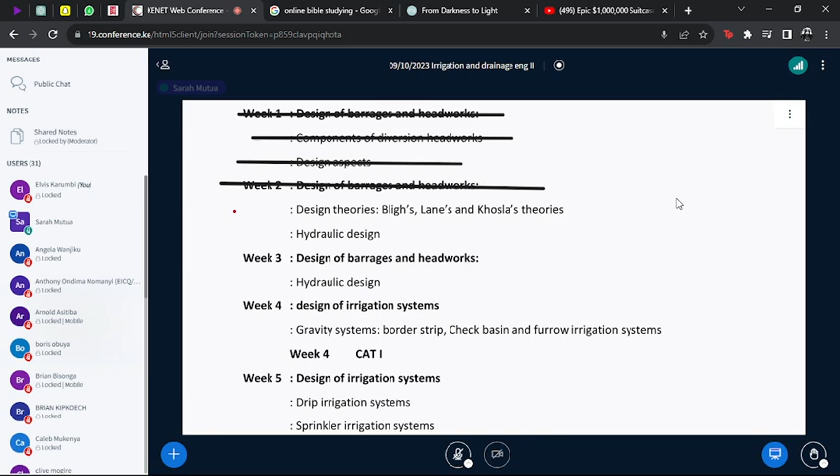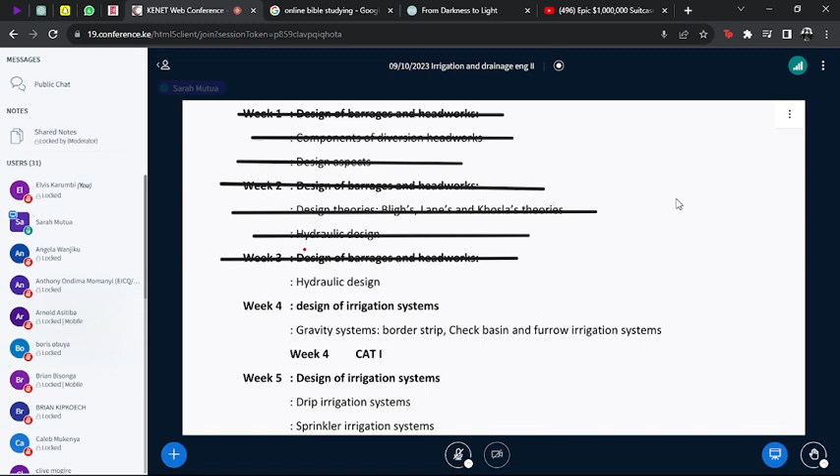In Khosla's theories, we have done up to, let me check. We have done up to that part. Oh, so I was worried for no reason, eh? Let me see. We still have a lot.

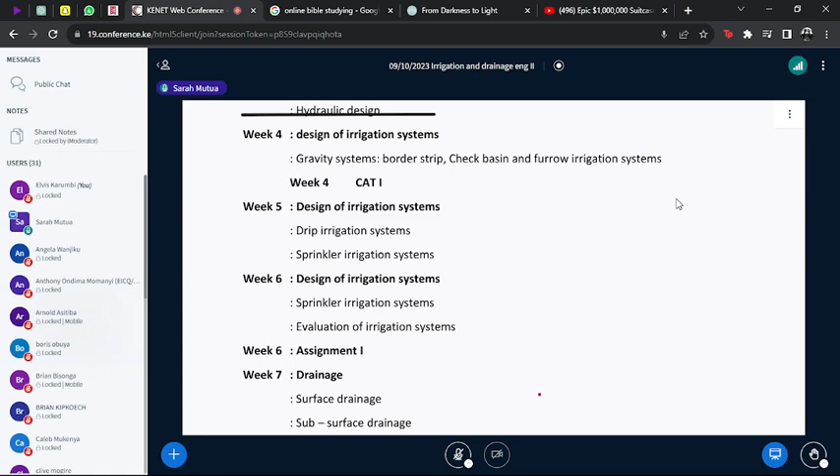What I want us to do today: after the water leaves barrages and diversion headworks, it goes to canals. Conveyance systems can be a pipe system or whatever, but most of the time it goes to a canal. And we are supposed to do canals somewhere. Yes, we are supposed to do drainage, and in drainage we are supposed to do canals. So I want us to go directly today and look at canals. We'll look at drainage later.

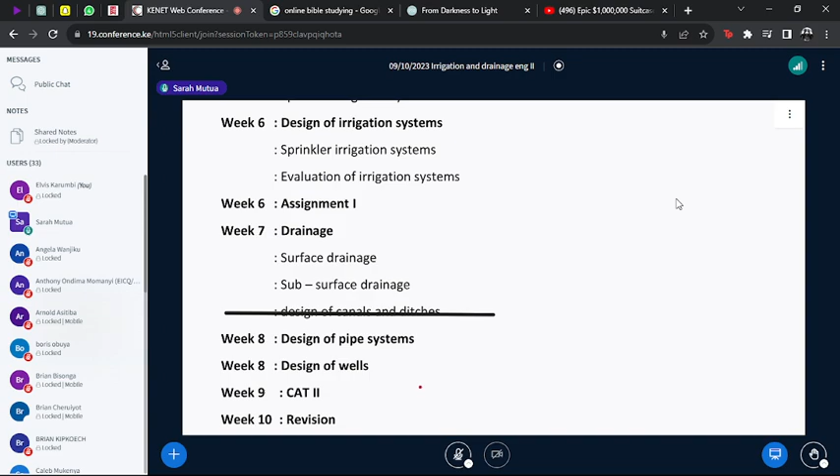Before we come to the design of the irrigation systems. Of course, we will start with gravity systems, then come to sprinkler, then drip irrigation systems. Design of pipe systems, I don't know whether I should give one, but I shall decide. I always leave that one undone because it is done elsewhere, like in design of water and wastewater systems. So today, I want us to look at canals.

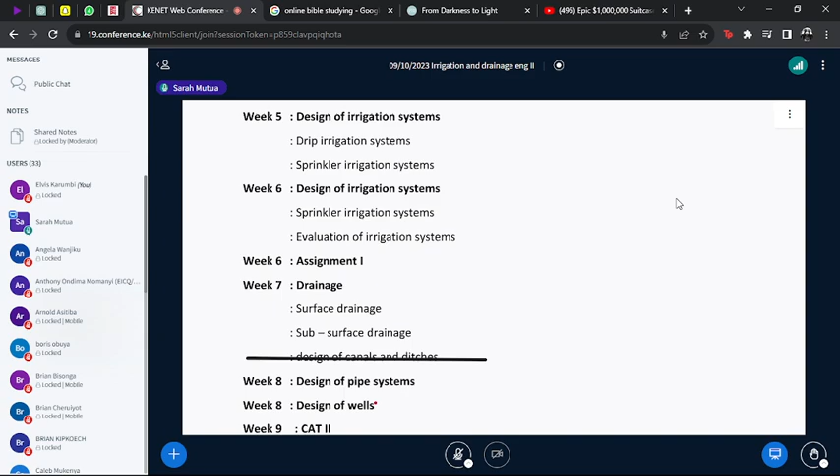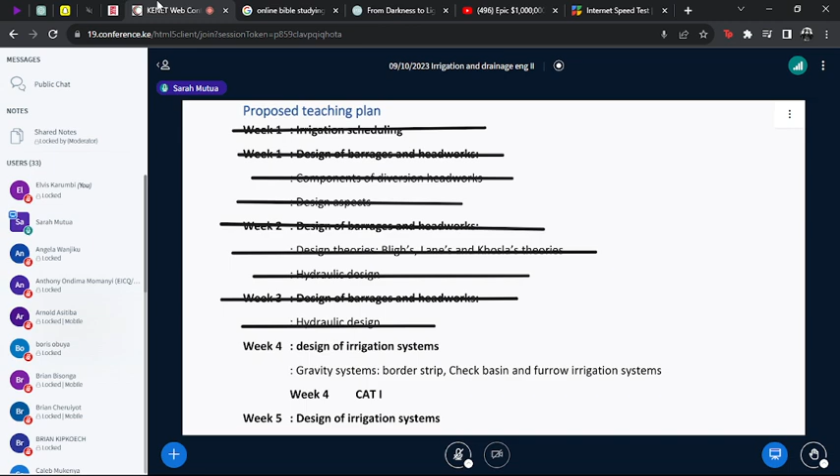I want to look at canals so that then I can take a snip of what we have here so that we can know where we are. Surface irrigation tool. All right. With that, let me open the canals. What am I doing?

So, like I've said, water, once it leaves the irrigation system, has to go to a conveyance system so that you can transport that water from the source to the point where it is supposed to be used in an irrigation scheme. Most of the time the water is delivered in earthen canals. If they are not earthen canals, we have looked at hydraulics, flow of water in non-erodible open channels, whereby the normal equations of Manning's, Chezy, and so forth are used.

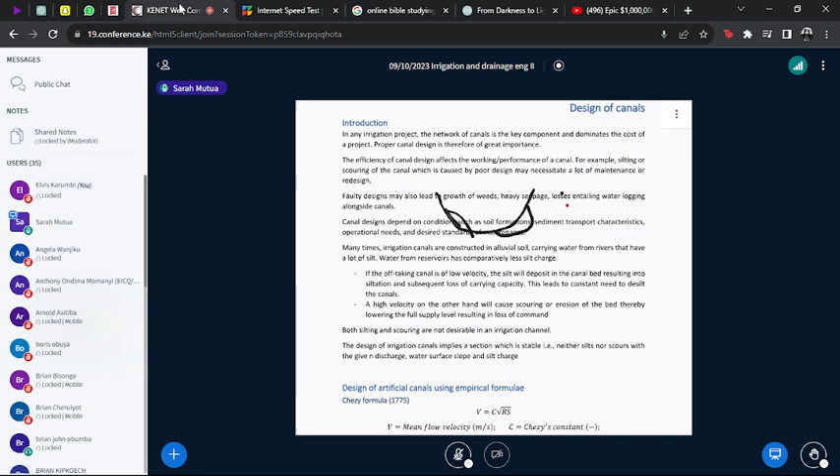But now, what happens when your channel is erodible? If it is erodible, that is earthen canals, for example constructed in alluvium soil, let's say initially you have constructed a channel that has such a cross section. One day you may have erosion on one side, or deposition, and erosion on the other side, such that the following day you have a channel that looks totally different because of erosion and deposition. Why? Because you have constructed that channel in alluvium, so it is erodible.

And depending on the conditions of flow, the slope and discharge, which control the velocity of flow, and also the amount of silt in the water. Remember, in rainy seasons we have higher silt content in channels. You are going to have either deposition or erosion. So in this case, the channel is changing from day to day.

Now my internet, if I become too shaky, you'll tell me. I tried to sort it in the morning. That is why I was late. But if I become too shaky, you'll tell me.

So the cross section one day is one thing, the following day it's different. The slope has changed, the wetted perimeter has changed. And so the formulas we have learned before for calculating flow, for example Manning's equation in non-erodible channels where the cross-section and slope are constant, can no longer be used. Secondly, when deposition and erosion happen, you can have many undesirable conditions. For example, with deposition you can have weeds growing in the channels, increasing resistance to flow, and greatly affecting the efficiency of your systems.

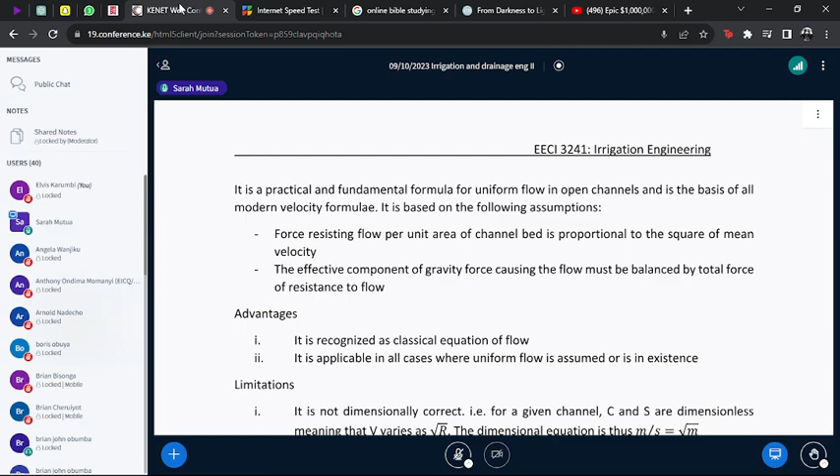It has certain advantages because, one, it is recognized worldwide as a classical equation of flow, the oldest. So it is recognized and it is applicable in all cases where uniform flow is assumed or exists. But it has some limitations. One of them, when you look at this equation,

velocity units are meters per second. The right-hand side, C, is a constant which is unitless. R, the unit is meters. S is unitless. So when you look at the units, meters per second, on the right-hand side, the resulting unit is square root of a meter. So that equation is dimensionally inconsistent, or we can say it is dimensionally incorrect.

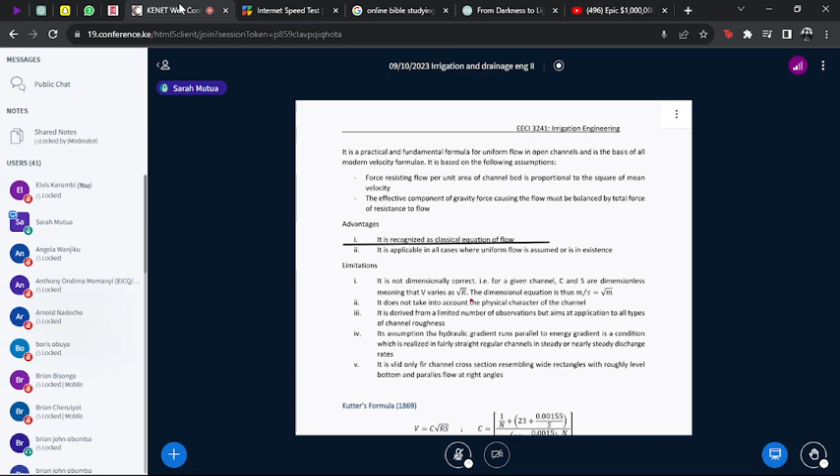And we have done dimensional analysis before, so this one is not dimensionally correct. Two, it does not take into account the physical character of the channel. Notice, one of the assumptions is that the effective component of gravity force causing the water to flow must be balanced by total force of resistance. Where does this resistance come from? It will come from the physical character of the channel, but the Chezy formula does not take any cognizance of that

kind of assumption. Thirdly, it is derived from a limited number of observations, but then it is applied in all types of channels. Roughness. Then the assumption that the gradient runs parallel to energy gradient, a condition which is realized in fairly straight regular channels in steady or nearly steady discharge rates. And I talked already about that slope, the water surface slope that we assume to be equal to the channel slope.

But what this limitation says is that it is based on an assumption of steady or nearly steady discharge rates. But does that happen always? Well, we know we can try to manage and control that by having canal head regulators, but are we going to have steady discharge? Then it is valid only for channel cross-sections resembling wide rectangles with level bottoms and parallel flow at right angles.

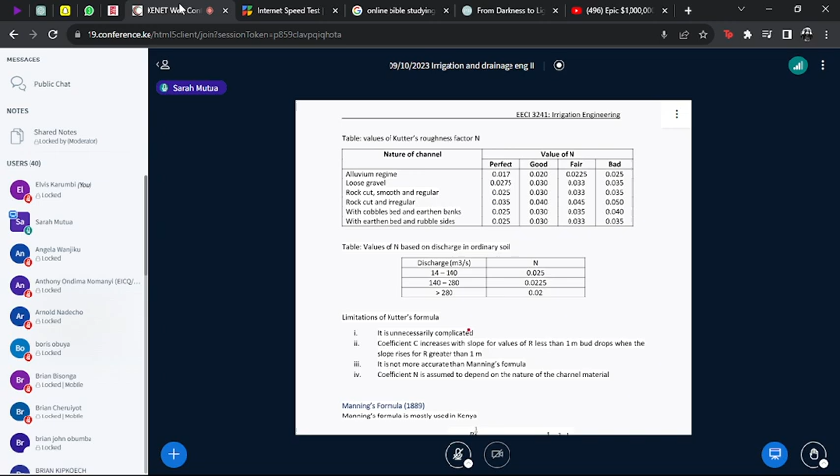One thing you notice about calculating velocity of flow using this formula, especially when you go to the field, there's a lot of subjective decision making. What is the definition of perfect? What is the definition of good? Fair? Bad? That is a question that you always have to answer. Even when you are doing Manning's formula, those are the questions you are supposed to answer when making a personal judgment call in the field.

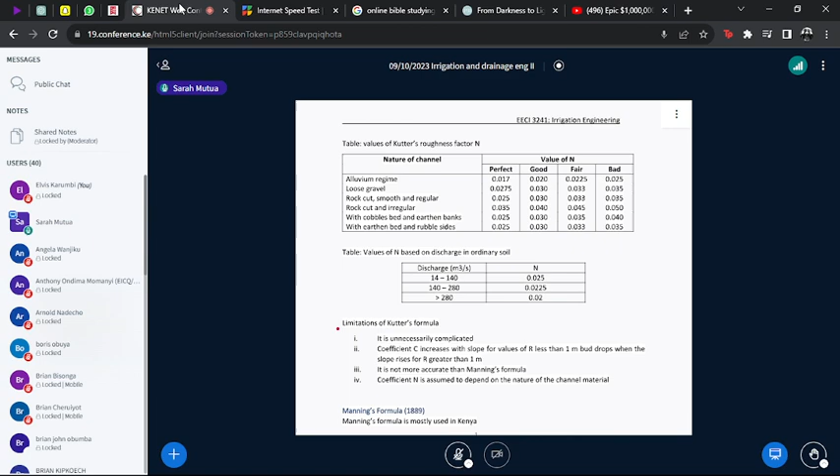The values of N also are based on discharge in ordinary soil, and the values are given. And we have some limitations. One, it is unnecessarily complicated. Really, look at where we have started: V is equals to C root RS, and then someone adds to C, and C becomes all this very, very complicated.

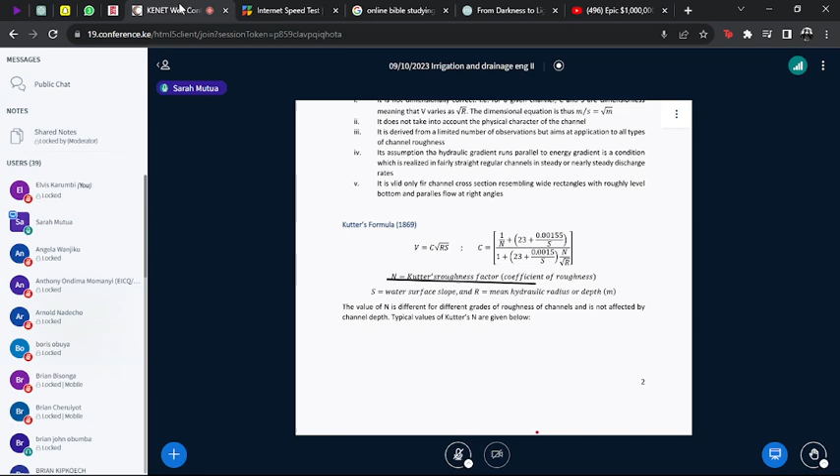Brian John Obumba, you got us joined with the call option, microphone option. I think we have agreed that before.

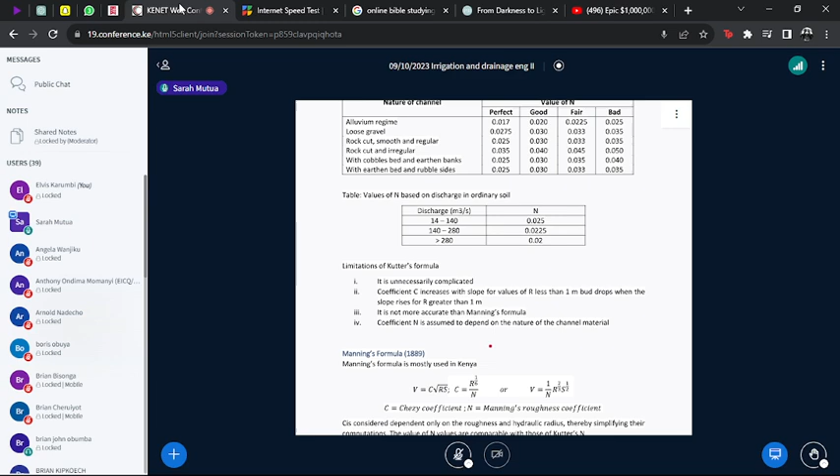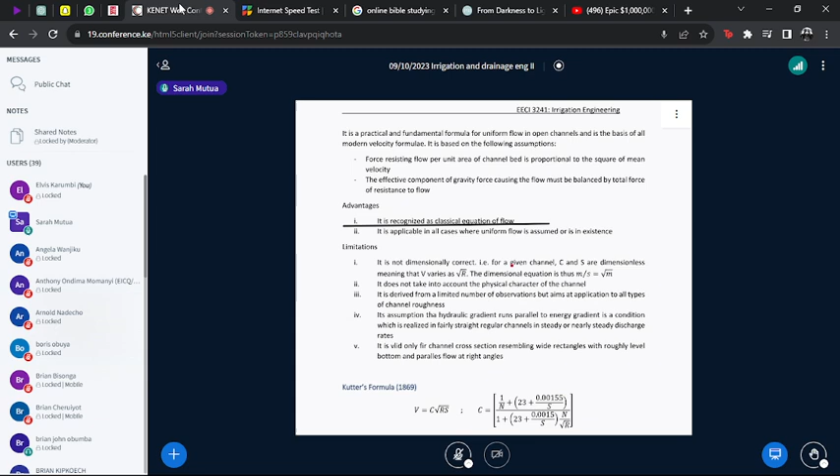Then we have: the coefficient C rises with slope for values of R less than 1, but drops when the slope rises as R is greater than 1. That arises from the formula configuration and the position of R in the equation. So what we are saying is C will become greater for values less than 1. When you get a square root of R less than 1, you're going to get a very, very small value.

And when R is greater than 1, the value is always going to be greater than 1. Then finally, N is assumed to depend on the nature of the channel material alone.

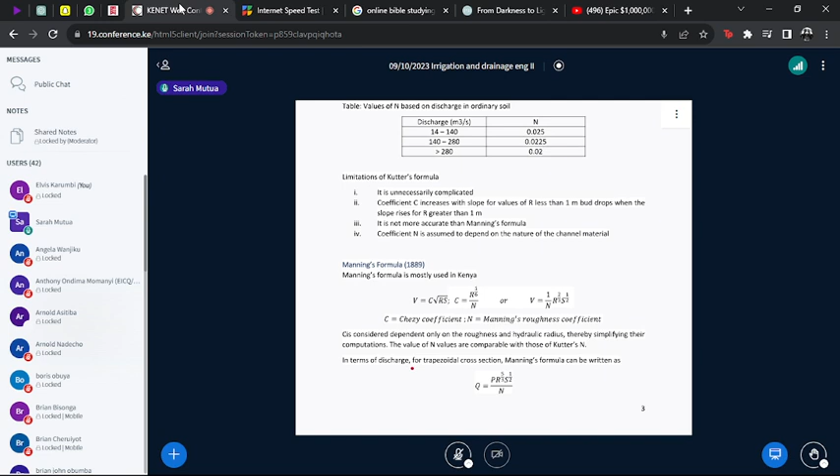Then we have Manning's formula. That one I know we have come across many times, whereby we still start from V equals C square root of RS, but now the C is much simpler. And then we have the introduction of Manning's roughness coefficient. And you can notice that these values of N, according to literature, are comparable with Kutter's N.

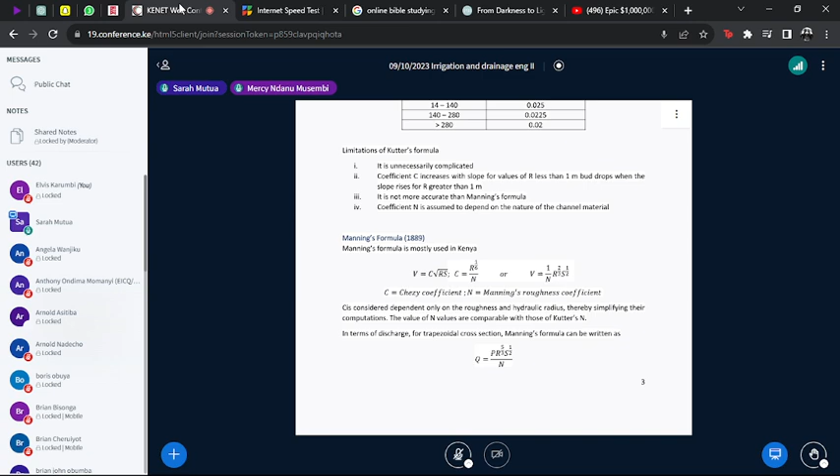If you have a trapezoidal section, calculating discharge through a non-erodible channel using Manning's equation can be simplified into this equation. We have some limitations. That is, the exponent of R in relation to C is not constant but varies depending mainly upon the channel shape and roughness. So imagine R is the hydraulic radius, and it is supposed to be constant for a given cross-section.

2, and this one becomes, the limitation is because C in Chezy's formula is supposed to be constant, but if R is varying for a given channel, then that means C is also supposed to change. But in Chezy's formula, the C is a constant.

Mercy is making tea or something, eh?

Then we have proper selection. The second limitation is that the proper selection of N to be used is a complex problem, and it depends largely on personal judgment. And I've talked about this. It may have seemed to be easy when we were doing hydraulics, but the complexity comes now, because we are supposed to be applying these equations in design. When it comes to design, you have to make personal judgment.

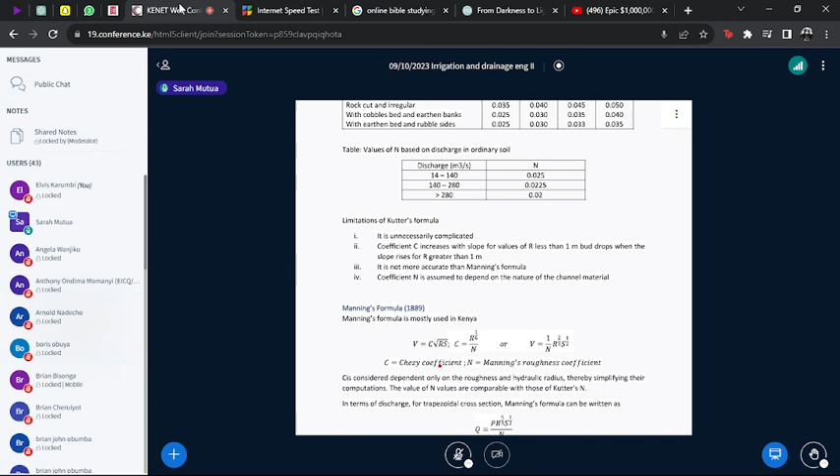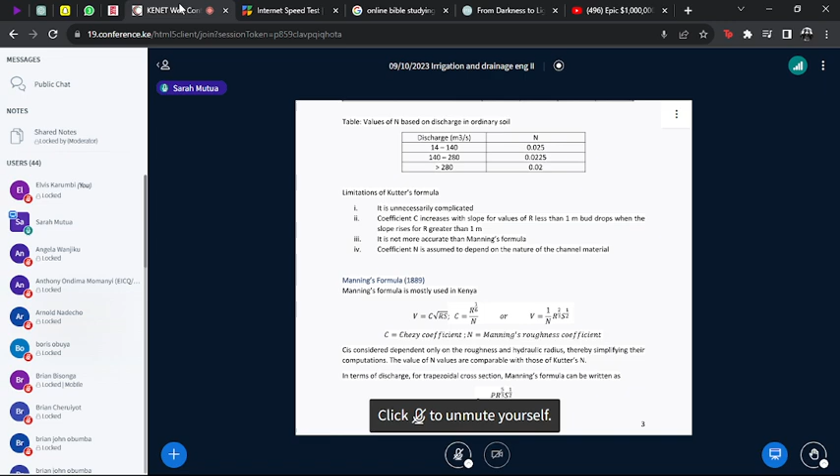Now, this single aspect that he did not provide the water surface slope meant it is possible to design any number of channel sections for a given discharge. When you look at Chezy formula, you can only have one velocity for a given slope and a given hydraulic radius. Now, according to Kennedy, when you look at his formula, the general critical velocity formula, there is no mention of slope anywhere. And now that one makes it very complicated.

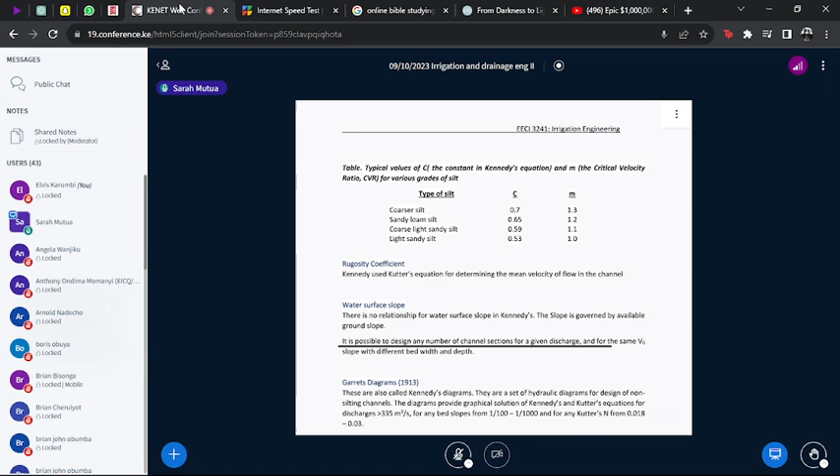You can now make many possible designs of channel cross sections for a given discharge. Because to get velocity, you need bed width and a certain height, and you can determine velocity and discharge. So you can change those parameters. If you don't fix the slope, then you can have a very large configuration. We call it some kind of equifinality problem, whereby you can have so many cross sections to deliver the same discharge.

Now, because of that, design of canals using Kennedy's formula is usually done by trial and error. So you assume a value of depth, solve your problem, finally calculate the slope, calculate the mean velocity using Kutter's formula, and then check. Are the two comparable? If they are not, you repeat the procedure again. Assume a new D, and then you repeat the procedure. We shall see how to do that.

And because of this trial and error method, Garrett in 1913 developed what we call Kennedy's diagrams and tried to make explicit solutions of that equation for channels with various characteristics. For example, for discharges greater than 335 meters cubed per second, for bed slopes between 1/100 and that, and for Kutter's N varying from 0.018 to 0.03. And we shall see those Garrett diagrams later.

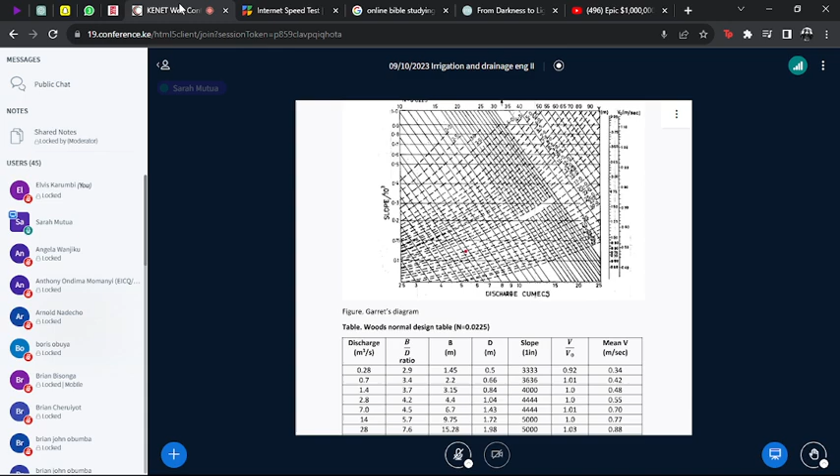So if you're given a certain discharge, where do we get a discharge? If we are designing a canal, Angela Wanjiku, how would we determine the discharge that we want to deliver? How would we? Angela Wanjiku, Anthony Ondima, Arnold Nadecho, who can try? Say area times velocity. It is area times velocity, but remember the area is what we are designing. The velocity will be associated with our area, but we have to deliver a certain discharge. How do you decide that I'm going to deliver, for example, 4 meters cubed per second? How do you decide?

That's a good trial. That's a very good trial. Remember, gross irrigation water requirement: you know you're supposed to deliver so much depth. You can convert that depth into a volume, and into a discharge if you divide it by the period that you need to deliver the water. So when you're designing irrigation systems, you have to know the gross irrigation water requirements, so that you can convert that into volumes and later into discharges.

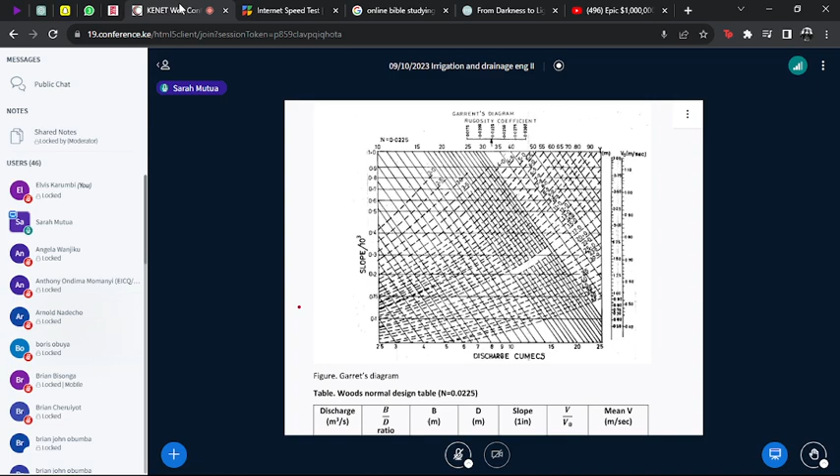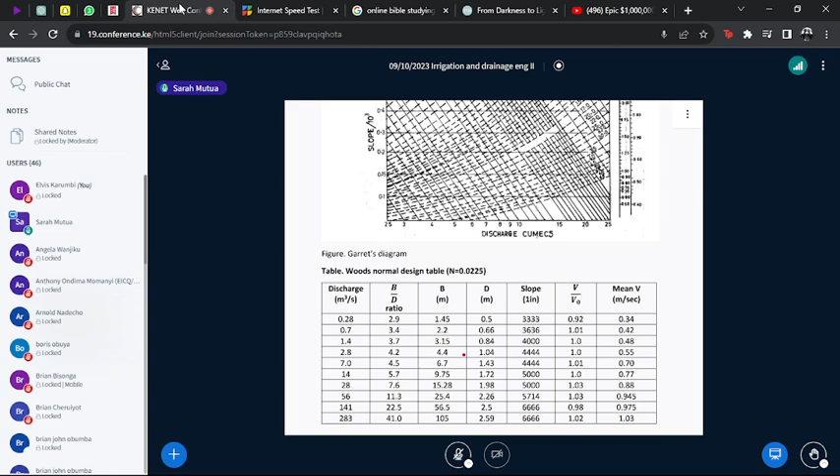The sloping whatever's, so where the two come to meet, the horizontal and the slanting lines, you get... there is some information that is missing, so I should get it, and then we revisit that diagram. So this is one of the Garrett diagrams, and let me come back to it later, after the break, and we are going to discuss it.

Now, the Woods normal design table: if you have a discharge and you have a B over D ratio, and either you have B, you can always determine D. And for each B over D ratio, there's a slope that is associated, and for that slope, you have your critical velocity ratio, and from that you can always get your mean velocity of flow, which is calculated from Kutter's formula.

We have some limitations with, I wonder whether we have other diagrams here. This is the only Garrett diagram. No, the others are Lacey's. And I always confuse reading this Garrett diagram with Lacey's diagram. I've never known why.

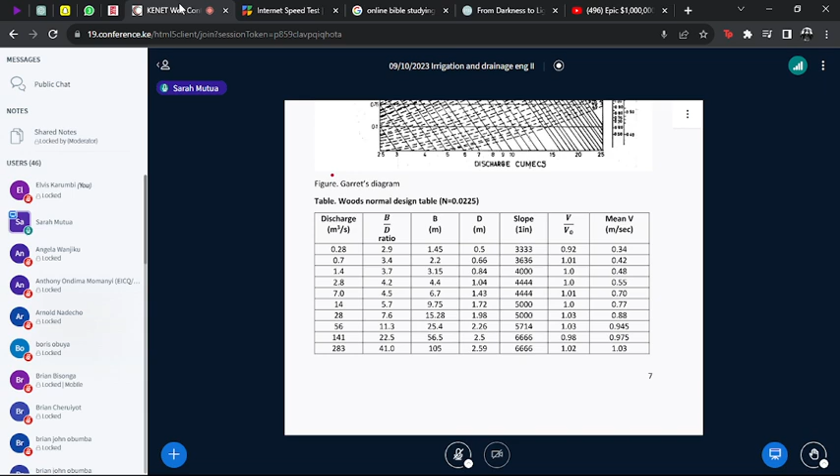So we have limitations of Kennedy's equation, and one of them is that he did not investigate to find out the correct formula for slope applicable directly to the design, causing a big problem. If you choose to solve a problem, you better solve it, so that anyone who comes after you doesn't suffer. But when designing using Kennedy's theory, it's like they say, no pain, no gain. You have to suffer a little bit. The trial and error is not good.

You have to have a little bit of experience to know, if I selected this value of D, what do I select if it does not agree with my mean velocity of flow? If the critical velocity does not agree with my mean velocity of flow, do I increase the D or do I decrease it? So you need a little bit of experience to know that.

So Kennedy took Kutter's formula and only adopted an N value of 0.0225 as an average value for channels. The challenge with that is, we know channel characteristics change from one channel to another based on management conditions and natural conditions. So it cannot be constant at 0.0225.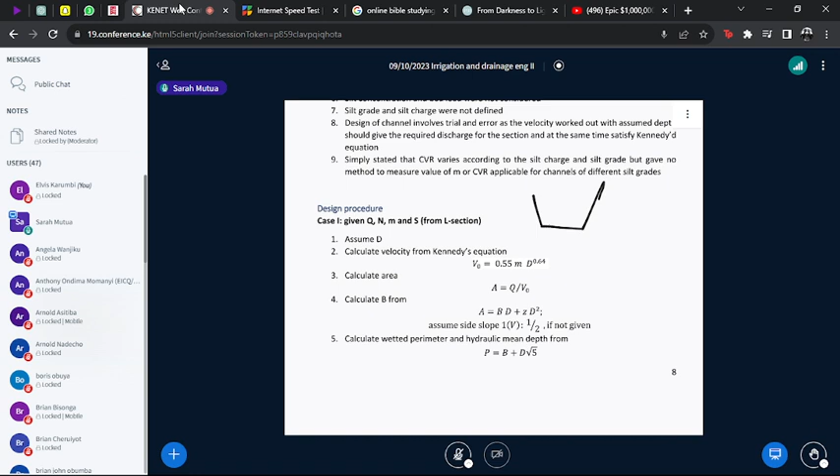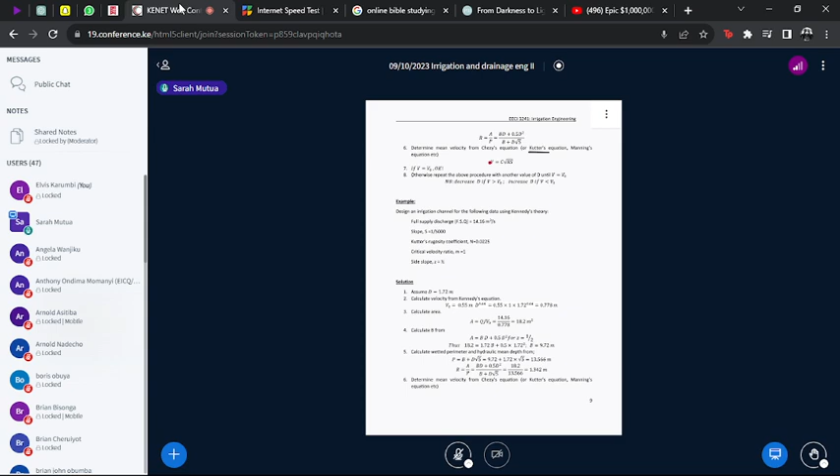Then from these two, A and P, you can calculate hydraulic radius. That hydraulic radius is used in Chezy formula or Kutter's formula. You can even use Manning's, but mostly theory requires that we use Kutter's, though I've seen Manning's work. Use Kutter's formula, calculate your V, and check it against the V you calculated in the beginning, the critical mean velocity of Kennedy. Are they the same? If they're the same, you're good to go. Otherwise, you repeat the procedure, assume a new value of D and repeat again.

So remember here you already have S. Here I have given a design example which you will follow yourself; it's basically application of those procedures. Secondly, you are given Q, N, M, B over D, but you're not given S. First, you determine A in terms of D. And remember, this z again is the slope, the side slopes of the channel walls.

Then you substitute this equation and Kennedy's equation into continuity in order to get discharge. Q equals A times V, V according to Kennedy, and then make D your subject. If you do, you are going to get this kind of formula. Once you have determined your D,

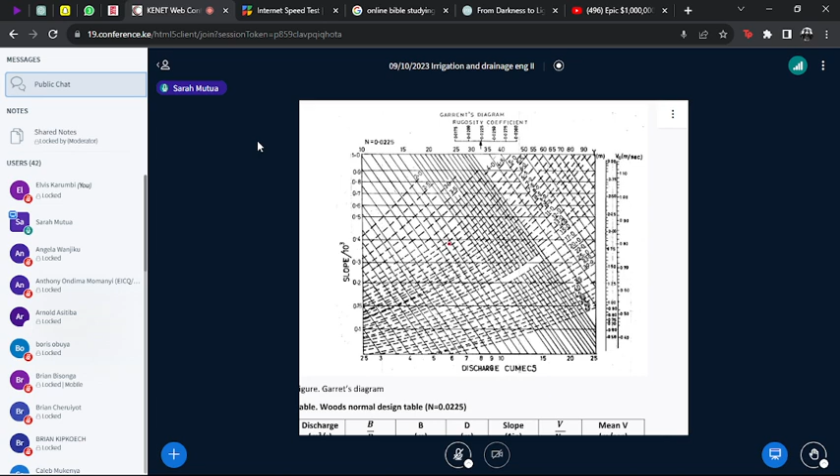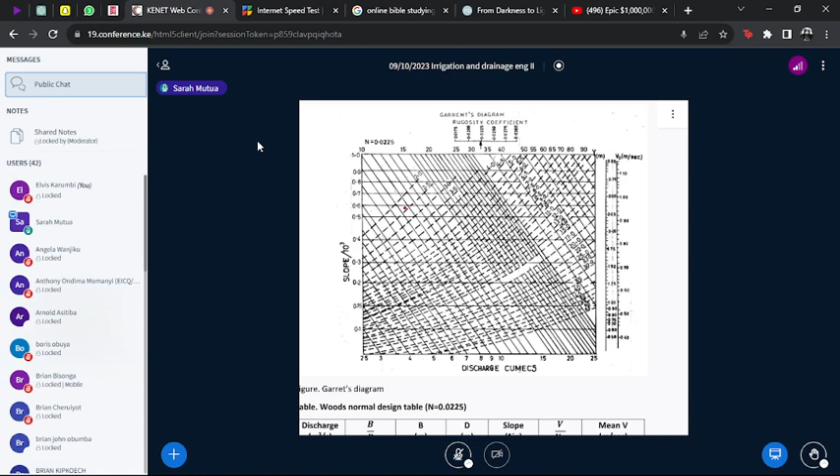Then you follow the discharge lines, where they intersect with the line from the slope. The slope are the horizontal ones. And if they intersect somewhere where it's not on a line, the horizontal lines, then they intersect on lines which are not the dotted ones, then what do you do? You can interpolate. So then you draw a vertical line through the intersection point and they will cut across several bed width curves.

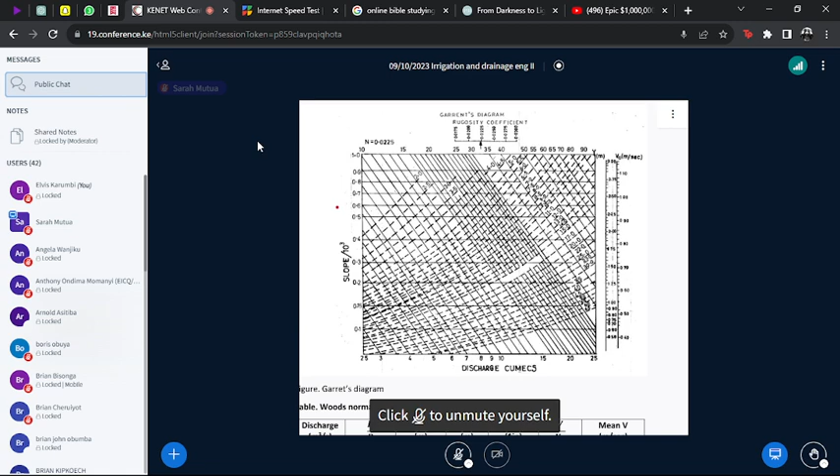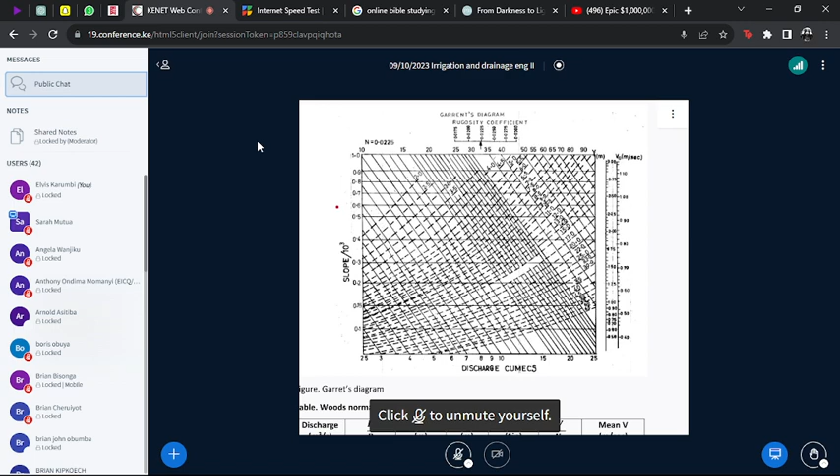Just give me a minute. I need to check something. Okay.

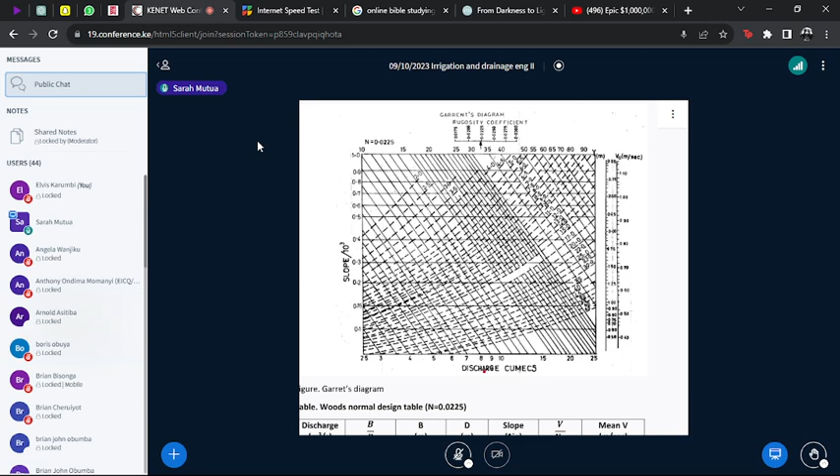Yeah, so now I said you need slope, you need discharge, and then where the two intersect, let's say, for example, if you are having a slope of 0.2 intersecting with, I want to see somewhere where they intersect precisely on a line. So let's say they intersect at this point. Let me draw here. A slope of 0.15 times 10 raised to power 3. So let's say we have that. So draw vertically. Draw a vertical line that is at 90 degrees.

And then, that line is going to cut when you draw vertically through that intersection point. Yeah, let me delete that one. I want to draw, so let's say I'm drawing from here, so that it intersects with this one of 0.5 here. So let me say somewhere here. So you have drawn a straight line. It intersects the slope at 0.15 and the discharge at about 5 at that point.

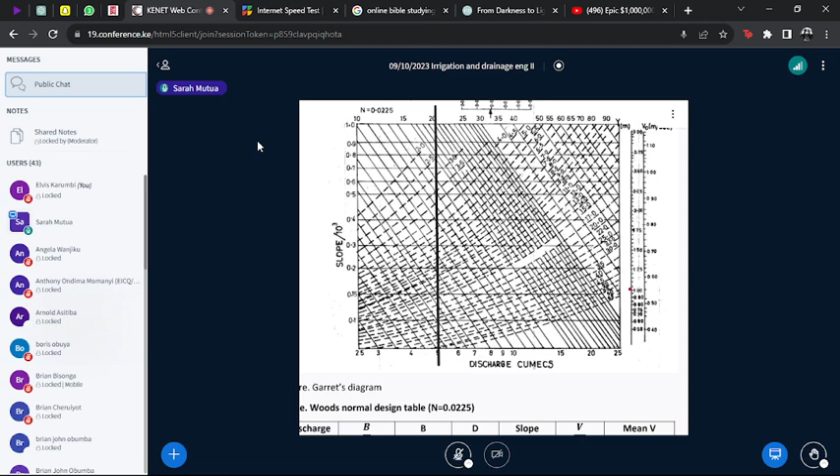So that vertical line is going to cut one of these B over D lines. And at the point where it cuts, you can read horizontally V naught on the right side. For example, that 0.55, if you draw it horizontally, it is cutting this curve at a B over D ratio of 14.0, and then horizontally you are coming to about a velocity of 0.5 something, 0.50 something. And then you have a B over D ratio of about 14.

Then you choose a pair of bed width, depth and V naught corresponding to the point of intersection obtained above. You can select B over D, a pair of them, two places where they cross. For example, we selected that one of 0.15 slope and discharge of 5, and you select another one. Now, notice if you now come to this part here, these slopes of 0.4, 0.3, 0.2 something may not apply.

Then you calculate the area of the channel corresponding to channel bed width and depth. Then the procedure follows like what we have seen before. Calculate the velocity corresponding to area A. Calculate V over V naught. And this should be equal to 1, or as given by the channel design, or repeat the procedure for other values of bed width until the value of V over V naught is the same as given for the channel design. So the essence of calculating more than one B over D ratio is so that you can ultimately iterate the procedure.

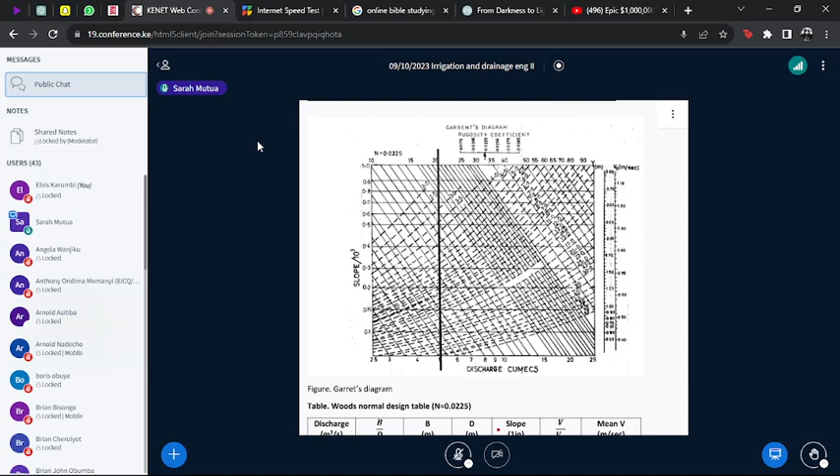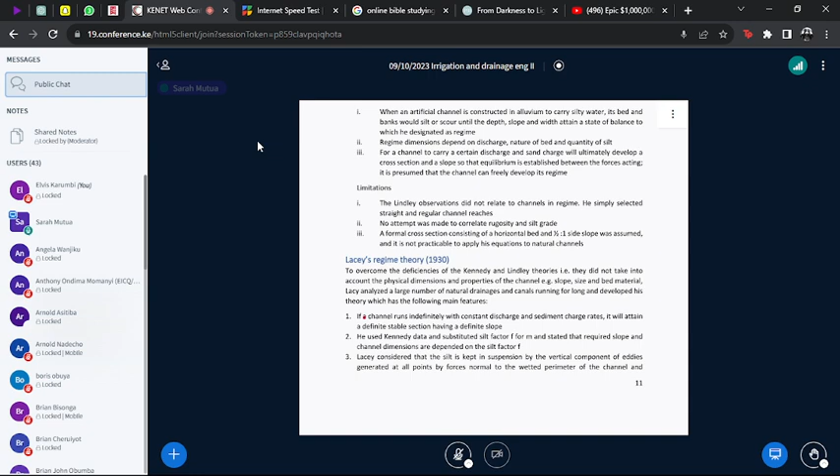Okay, so it's already 8:54. Even if we were to start Lacey's, let me see, we are at what page? We are on page 11 and we are supposed to go to 26. We will not finish. So allow me to end at this. 26 should be tutorials. Yeah, we are supposed to come to 24. We won't finish. So we will finish this later this week, and then start with the next. We'll do Lacey's theory when we come back.